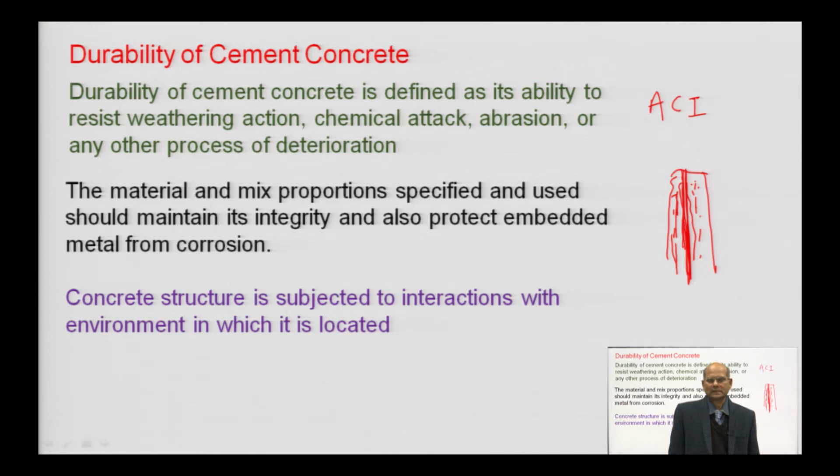Concrete structure is subjected to interactions with the environment in which it is located, so environmental factor is very important. What are the exposure conditions? Depending on that, different codes have given different exposure conditions. Indian standard IS 456 has also given certain environmental conditions, which we will discuss later.

This is the minimum working capacity of the structure. After that, our structure will not be fit for service. Initially we have 100% capacity here. As time passes, due to defects in the concrete, corrosion in reinforcement, abrasion, fatigue and other parameters, concrete strength will go down.

If there are more defects in concrete, the service life can reduce to, say, 35 years. Many structures constructed in Delhi, where I am staying in Dwarka, have durability problems. Structures constructed about 15 years back are showing cracks, severe cracks that need repair, and if repair is not done, within 4 to 5 years that building may collapse. So why is this happening?

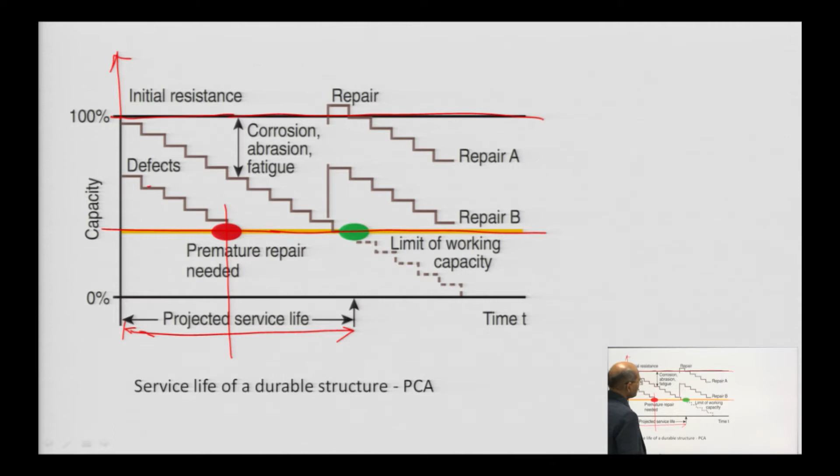Even if the structure has completed its service life, if you want to extend its life, what do we have to do? We have to repair the structure and increase its capacity. As you increase its capacity, slowly it will once again go and decrease. Similarly, we can go for extensive repair work so that the strength goes back to the original condition. In that case, this will go for some more time and reach here.

So, either you want to invest more money at a time and repair here, so that the life will increase, or if we do some patchwork or temporary repair work, then once again you need to repair.

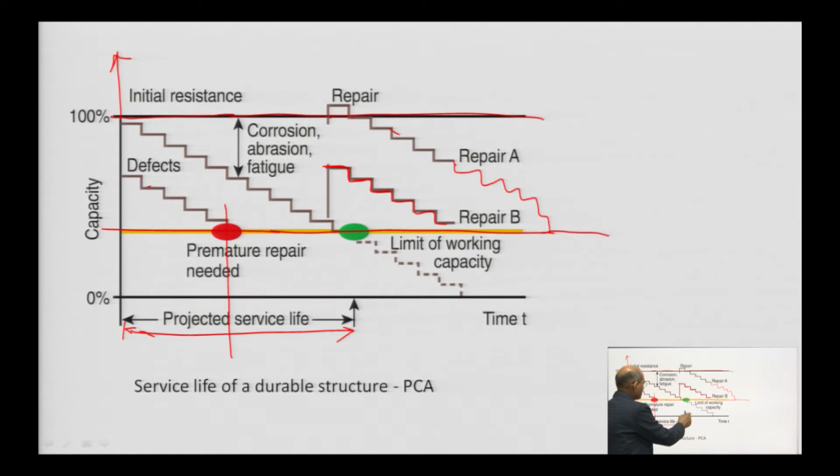So, service life of the structures depends on the durability. A durable structure will work for this period of time, that is, the design life.

The process of deterioration in concrete is due to sulphate attack, seawater attack, acid attack, ingress of carbon dioxide, chloride, water, oxygen, which leads to corrosion in the reinforcement, frost action, and alkali aggregate reaction.

Most of these, from item number 1 to 3, sulphate attack, ingress of carbon, or frost action, are directly related to permeability of concrete. If our concrete is more permeable, there will be ingress of components like carbon dioxide, chloride, sulphate, water, oxygen from the environment, which will cause deterioration in the concrete.

So the main fact is we have to make impermeable concrete, and that depends on many factors. Depending upon the environmental exposure condition, we need to change the type of cement as per the requirement.

So minimum amount of cement is also fixed. For a particular environmental condition, whether it is plain cement concrete or reinforced cement concrete, we have to give some minimum amount of cement.

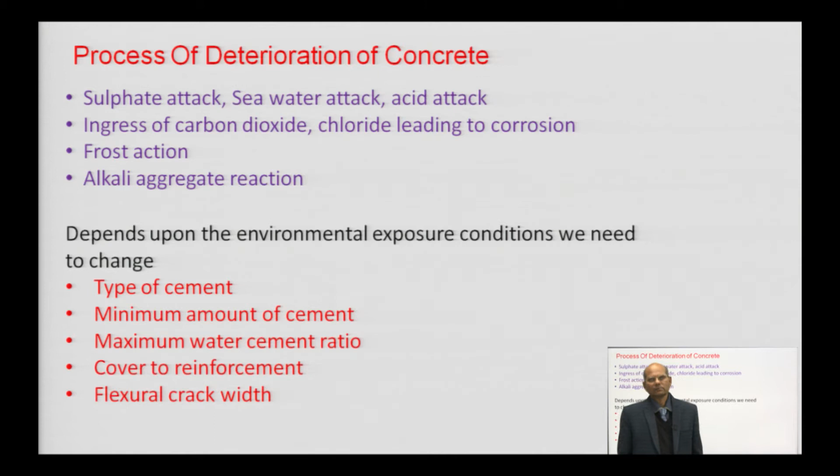So all these things we have to consider for durable design. Like this, I have shown certain structures here.

If you see, here is the Bhakra Nangal Dam, the second highest dam in Asia. This dam may be subjected to different types of problems, so those problems have to be addressed before the start of the work.

Similarly, here I have a cooling tower for a thermal power station. Here it is always subjected to water, so all these things have to be taken into consideration so that deterioration should not take place.

Photograph number 3 - here is an offshore structure. This structure is subjected to different kinds of environmental problems, like marine conditions.

The water of the sea is having lots of salt, so water is salty, and there is a rise in level - during high tide and low tide, water will go up and down. During high tide there will be a splash on this surface, and due to this splash, the structure is also under some problem.

And not only that, if you see the top structure, there also the environment is such that air is loaded, wind is also loaded with chloride. So all these things we have to consider here.

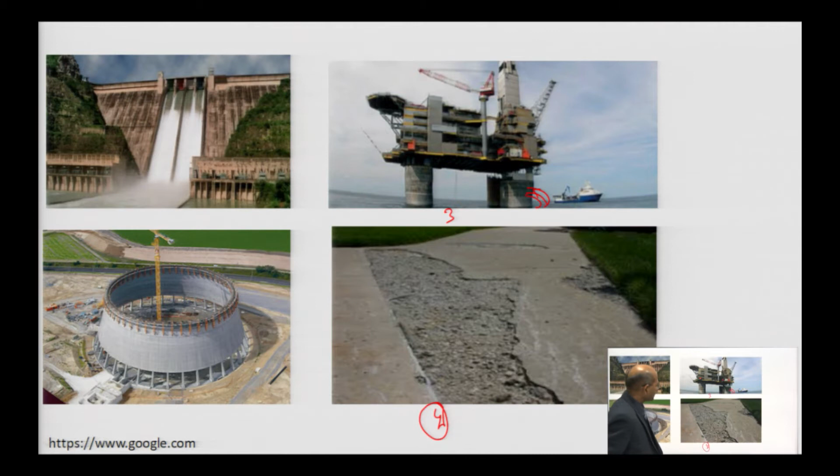This is plate number 4, showing deterioration observed due to frost action. Freezing and thawing action is creating this type of problem if you have not designed the concrete properly.

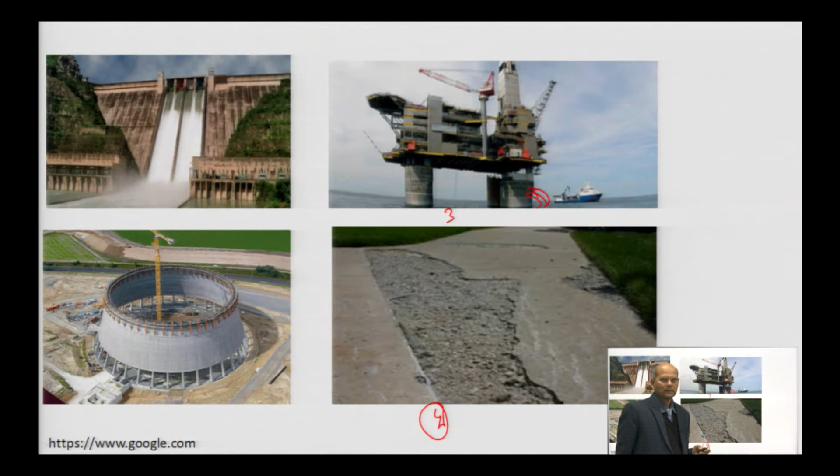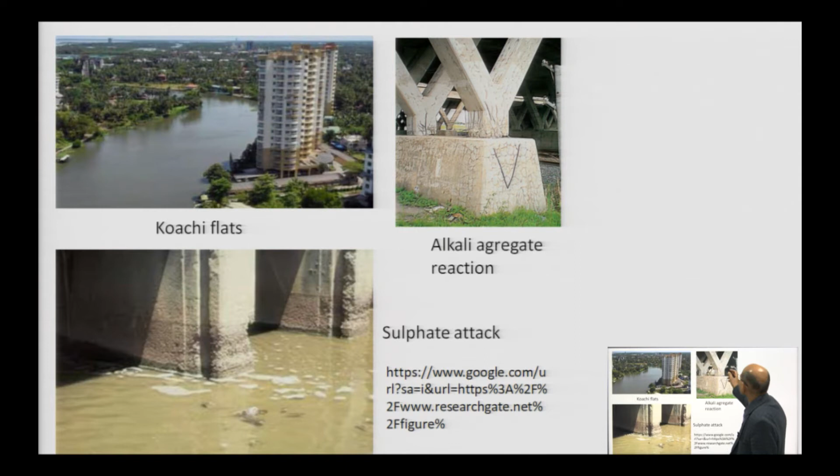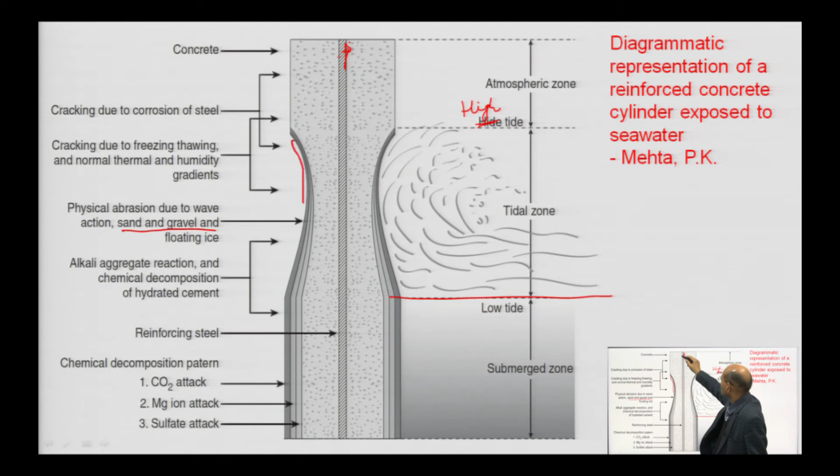And lastly, all these things, if this reinforcement is going to get corroded, the volume will increase. So after the increase of volume, what will happen? This structure will get cracked. Due to this corrosion, once again more ingress of oxygen, water, chloride will take place, and due to the penetration of these harmful ingredients, rate of corrosion will increase.

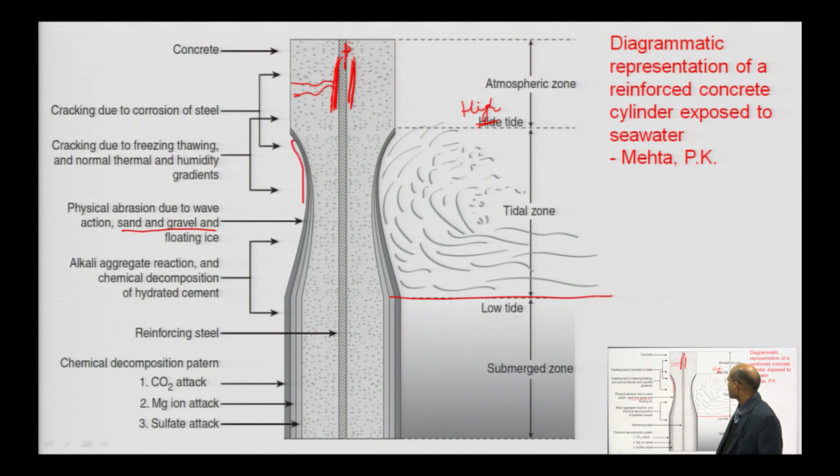So these are the actions which we have observed, how this thing is going to affect our concrete. So durability is directly related to the permeability. If our concrete has been made giving due consideration, then certainly it is not going to deteriorate, it will serve its life.

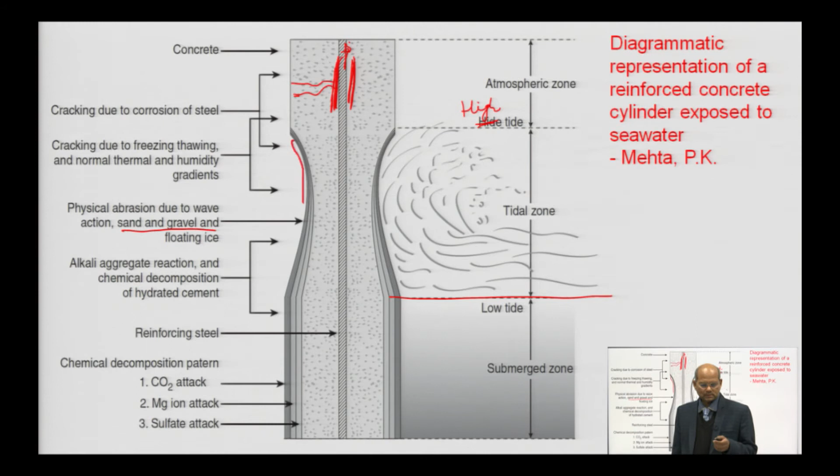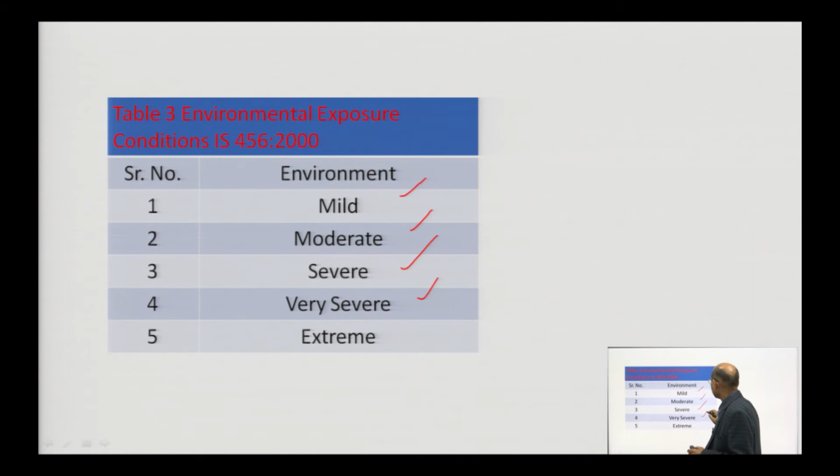So if you see here, this is IS 456, we have 5 exposure conditions, environment. We have mild exposure, moderate exposure, severe, very severe and extreme. If you go to Japanese code, they have divided into 3. If you go to Euro code, they have also classified. So each and every country, based on their environmental conditions, has classified their environment in a different way. For India, we have divided this into 5 zones.

It may be even in one place also, that portion may be mild or moderate. Suppose we take the example of Delhi, which I have mentioned in the earlier lecture, like Dwarka. So the ground is having lots of sulphate and chloride more than permissible limit. And if you consider the slab, it is inside your room, not directly subjected to carbon dioxide or more water vapor or chloride or sulphate. So you can consider that mild, but soil depends on the area, we can consider their foundation is subjected to moderate or severe conditions.

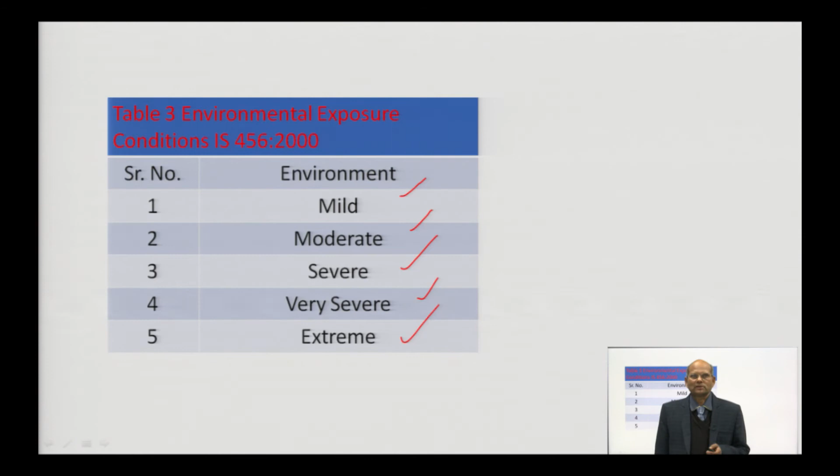Based on that, we have to design the concrete. So mix proportion we have to take care, so that our mix design should be related to this exposure condition. These are the exposure conditions which has been explained here. If concrete surface is protected against weather or aggressive conditions except those situated in coastal area, you can say it is a mild exposure condition.

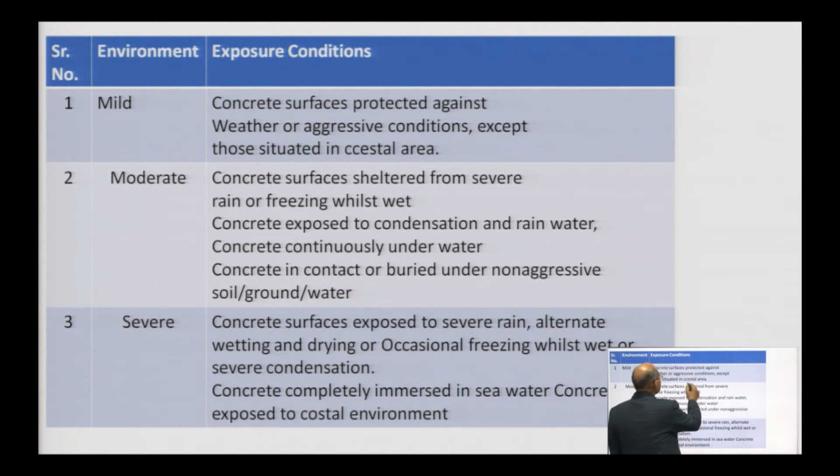Even if the surface is protected, if it is in a coastal area, you cannot consider it a mild exposure condition.

Similarly, we have a moderate condition. Concrete surface sheltered from severe rain or freezing, while wet concrete exposed to condensation and rainwater. Concrete continuously under water, concrete in contact or buried under non-aggressive soil, ground or water.

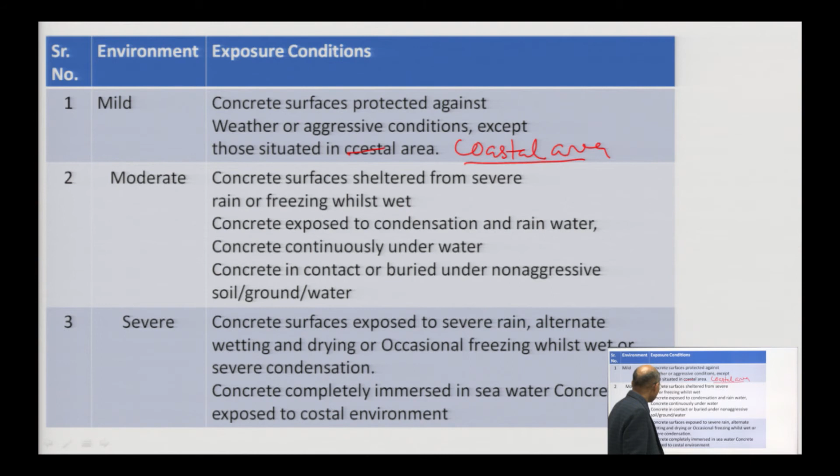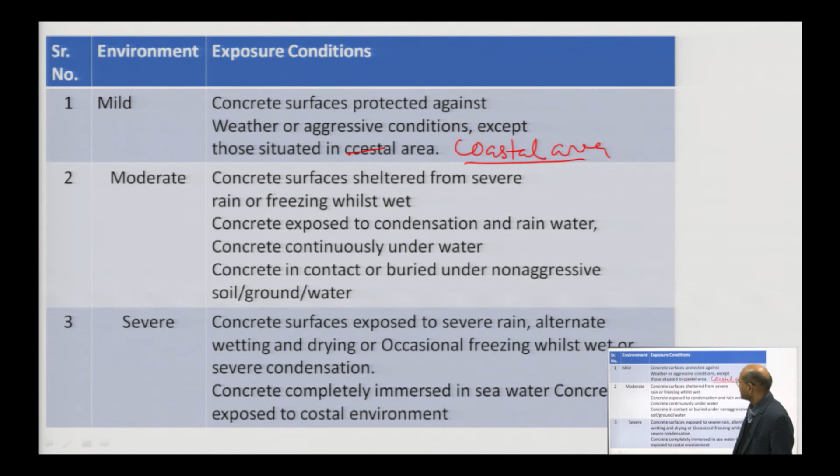So what is severe? We are observing concrete surface exposed to severe rain, alternate wetting and drying, or occasional freezing whilst wet, or severe condensation. Concrete completely immersed in sea water, concrete exposed to coastal environment - all this is severe condition. So if our structure falls in this category, we have to plan our design mix based on that.

Similarly, we have very severe conditions. What is very severe condition? Concrete surfaces exposed to sea water spray, corrosive fumes, or severe freezing condition while wet, concrete in contact with or buried under aggressive subsoil or groundwater. So suppose we are considering an area which is nearer to the coastal area, we have to consider the very severe condition.

Similarly, extreme condition - that is the maximum condition: surface of members in tidal zone, members in direct contact with liquid or solid aggressive chemicals. Suppose you want to make a silage which is subjected to aggressive chemicals like acids, you have to take special care for design of the mix.

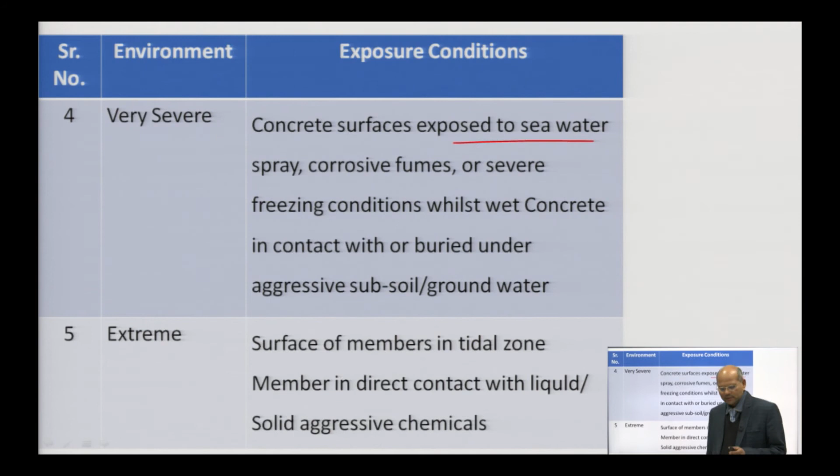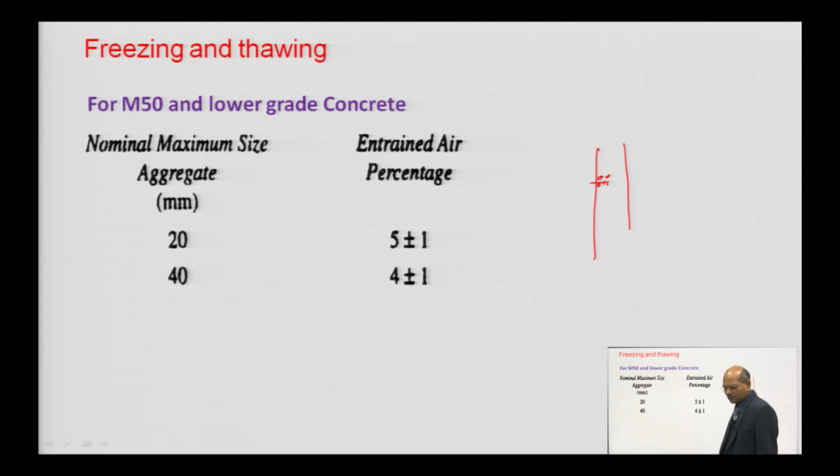So freezing and thawing - what is that? Suppose your structure is in Simla or Srinagar, where rainfall or snowfall is there. At that time water will enter the pores. Water will enter the concrete capillary and it will get frosted.

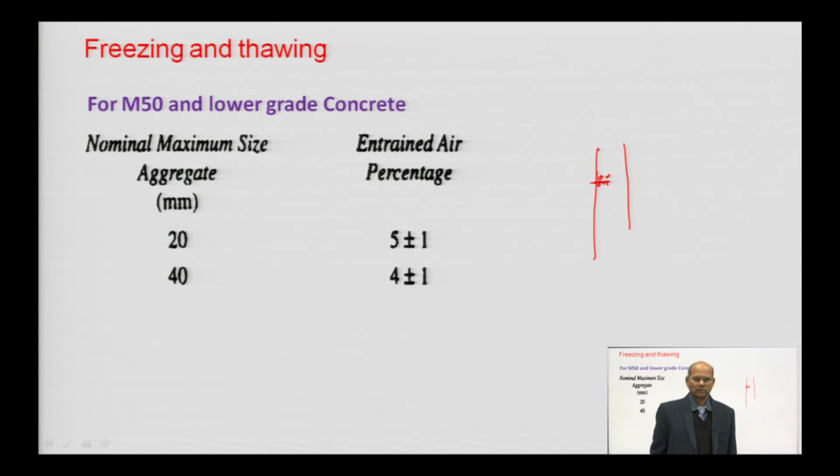After the frosting, it is going to put a certain pressure on this. So this pressure will increase the crack. Thawing means when water will come out, due to the rising temperature. That time once again - freezing and thawing is a cycle.

So once again another cycle of snowfall or drop in temperature, moisture will increase this crack and once again volume will increase, because the volume of snow is more than the volume of water. Water is having a peculiar property: at 4 degrees centigrade volume is constant, and if you go above or below 4 degrees centigrade, the volume increases. Due to the increase of volume, they exert lots of pressure and finally cracks will develop.

Considering all this fact, what we have to do is make the concrete which is having air entrainment. Generally air will always be there, 1 to 2% in the concrete, but if our concrete is subjected to freezing and thawing, we have to introduce air bubbles, we have to entrap the air in the body of the concrete.

Suppose a bubble is here on the concrete surface - if water goes here, it will percolate and this part will be subjected to pressure, and this portion will only get a crack, and it will join here. Due to this circular nature of the small bubbles, stress concentration is not there, so the crack will not further propagate.

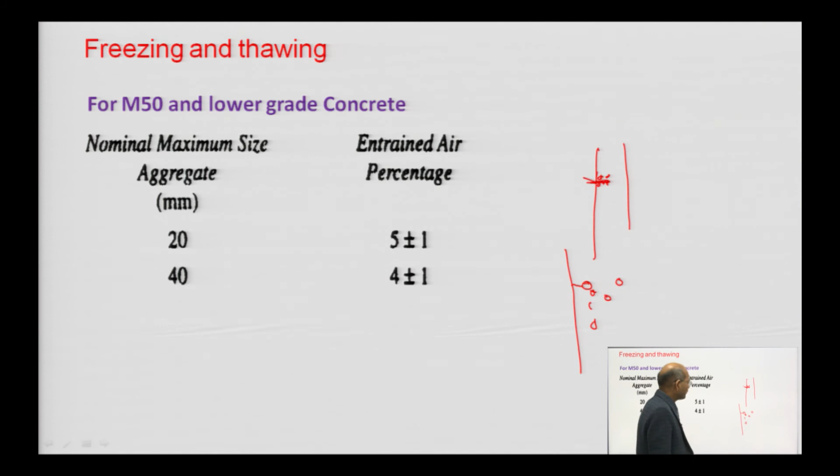So to stop that, what do codes say? If our grade of concrete is M50 or lower, and if it is made of 20 mm downsize aggregate, then entrapped air should be 5 plus minus 1%.

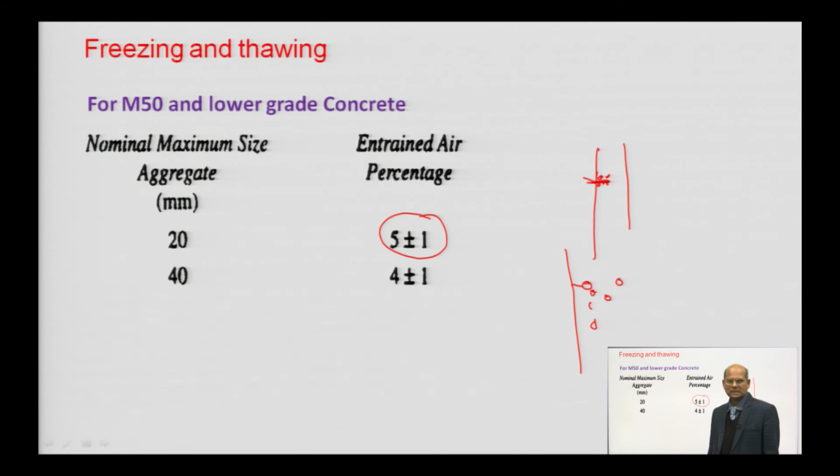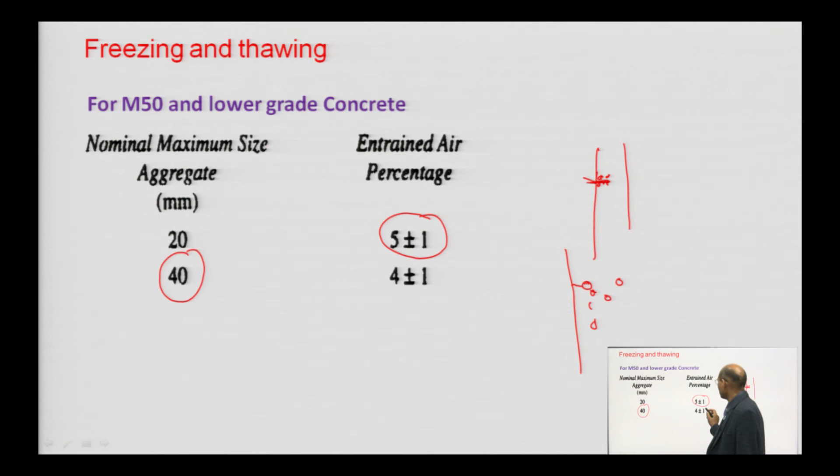So, for that we can use aluminum powder to generate air bubbles. Similarly, if our maximum size of aggregate is 40 mm, then we have to entrap air for 4 plus minus 1%.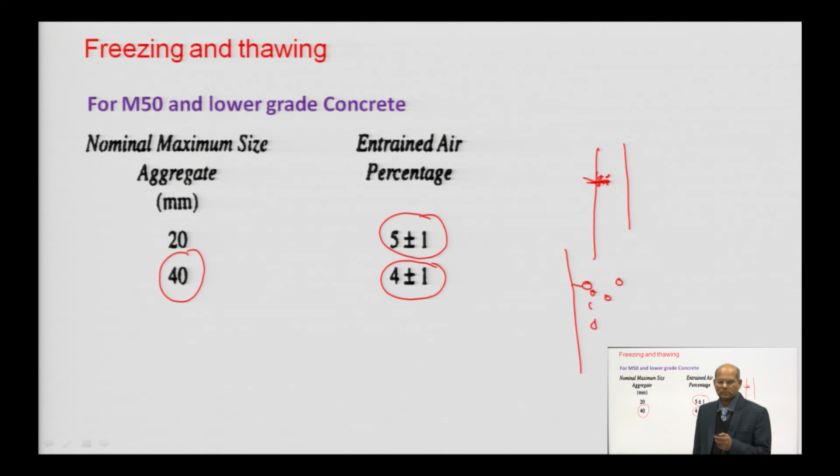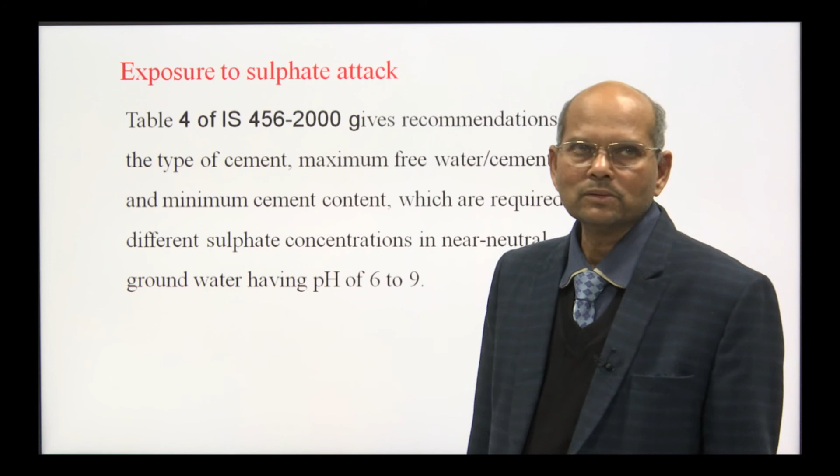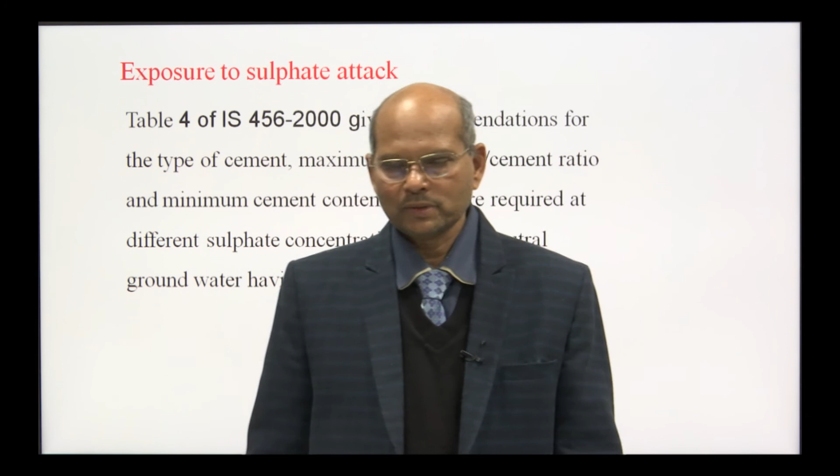If your structure is subjected to sulphate, what will happen? The sulphate will react with the calcium hydroxide and produce ettringite, whose volume is very high. Sulphate also reacts with alumina, because if the C3A component is more than 8% in the cement, that also reacts with the sulphate ion to produce ettringite. Since the volume of ettringite is very high with respect to the concrete, it puts pressure on the concrete and cracks develop.

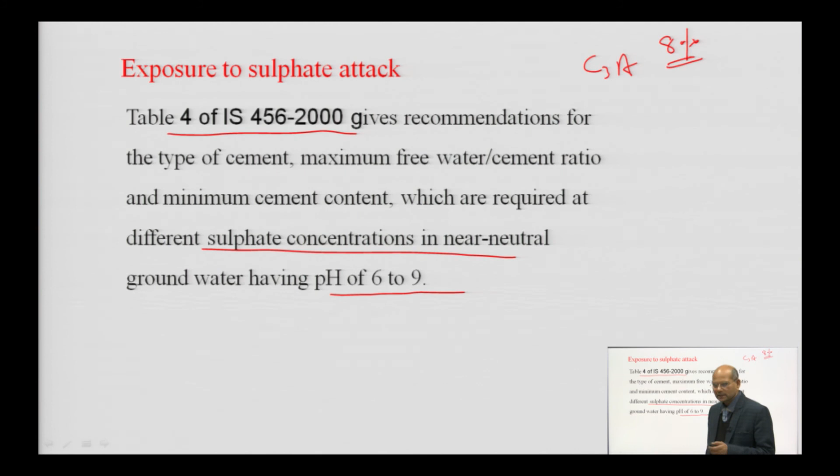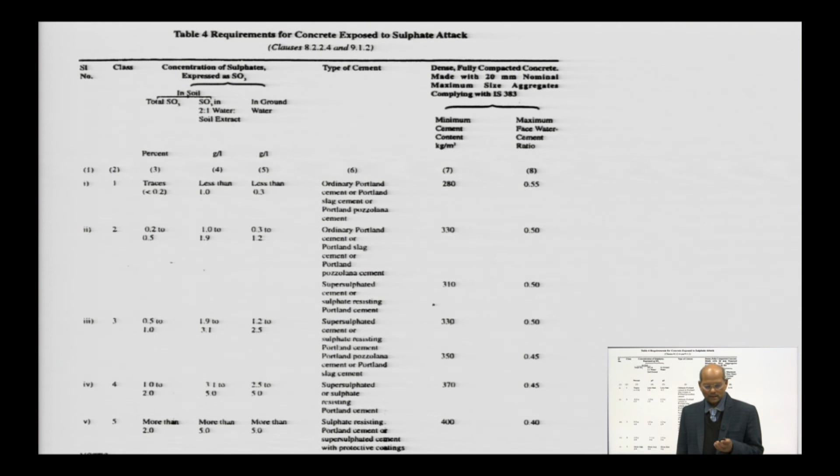So, there is Table 4 in IS 456 which we refer to in order to understand exposure to sulphate attack. You should download IS 456, which we will study during design of structures. Based on the exposure condition and amount of sulphate attack, it specifies the type of cement, maximum free water cement ratio, and minimum cement content required at different sulphate concentrations. These concentrations are given for water with pH value 6 to 9. Let me show you Table 4, although it's very small here since I copied it directly from IS 456, so please download and see the conditions yourself.

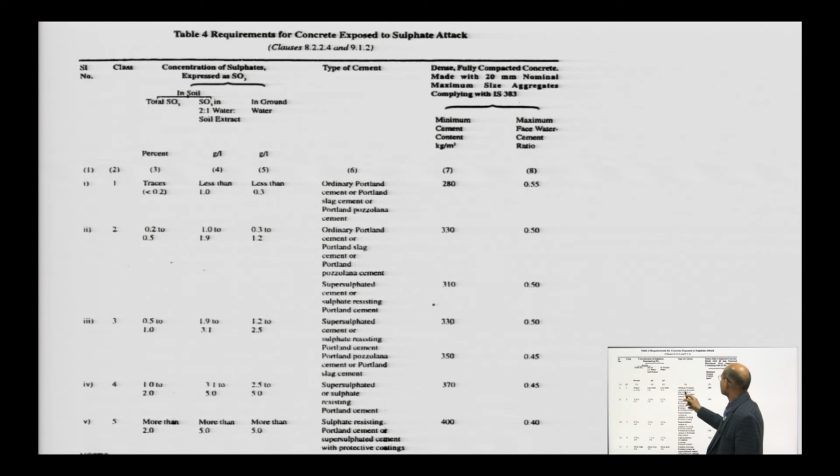Let us say our total SO3 is less than 0.2%. In that case we can use ordinary Portland cement, Portland slag cement, or Portland pozzolana cement, with minimum amount of cement as 280 kg per meter cube and maximum water cement ratio as 0.55.

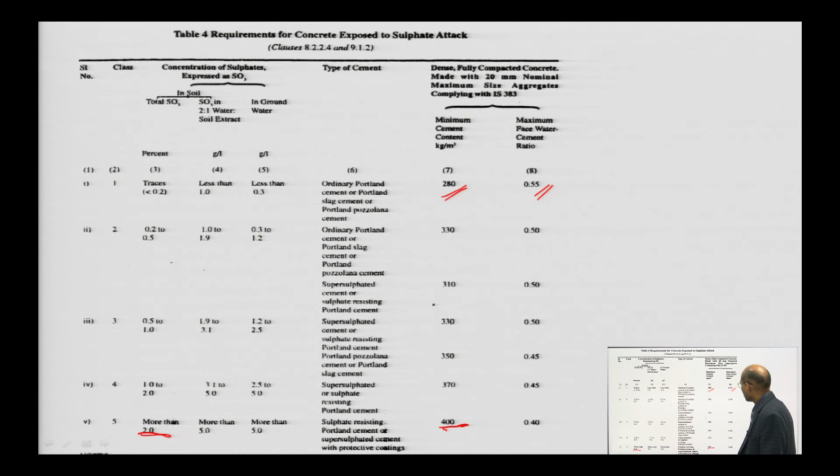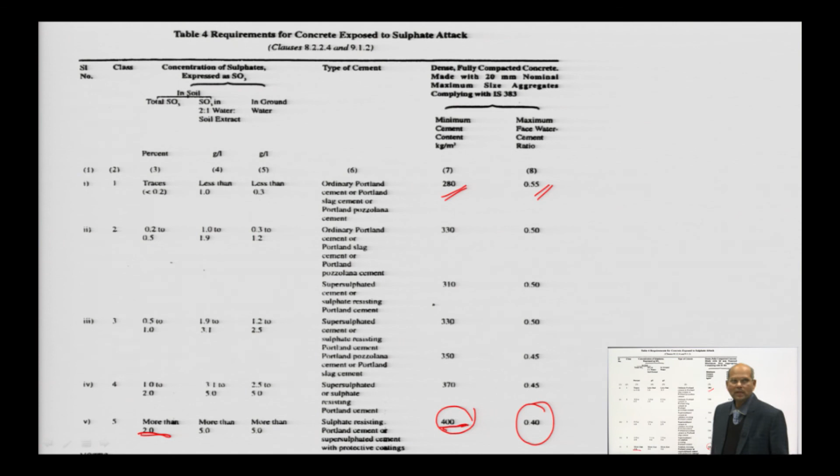Similarly, if the concentration is more than 2, in that case we have to use a minimum of 400 kg per meter cube of cement, and the type of cement should be Portland cement, sulphate resisting Portland cement, or super sulphated cement with protective coating. We also have to provide certain protective, non-permeable coating. So minimum amount of cement and maximum water cement ratio are restricted, and you have to refer to this code while designing the mix.

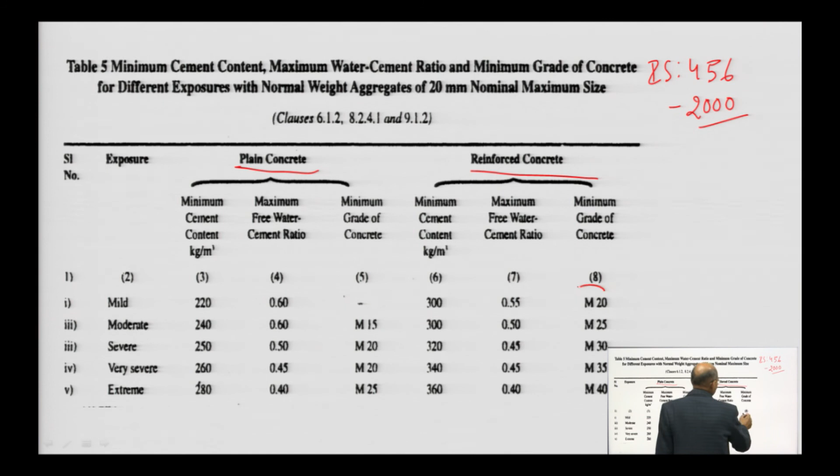Now if you see Table 5, once again taken from IS 456:2000, for mild exposure they have given requirements for plain concrete and reinforced cement concrete. The minimum grade of concrete cannot be less than M20 even for mild exposure. For extreme exposure, the minimum grade of concrete has to be M40, and you can't use less than M40. Similarly, maximum water cement ratio is restricted to 0.4 for extreme condition and 0.55 for mild exposure. Minimum amount of cement is 300 kg for mild and moderate exposure conditions, and for severe condition it's 320 kg, very severe 340, and for extreme condition 360. This is what's required for RCC work.

Similarly, for pre-stressed concrete, the grade of concrete is also mentioned - what should be the minimum grade of concrete. If you want pre-stressed concrete, you have to refer to IS 1343:2012, from which you can get their requirements.

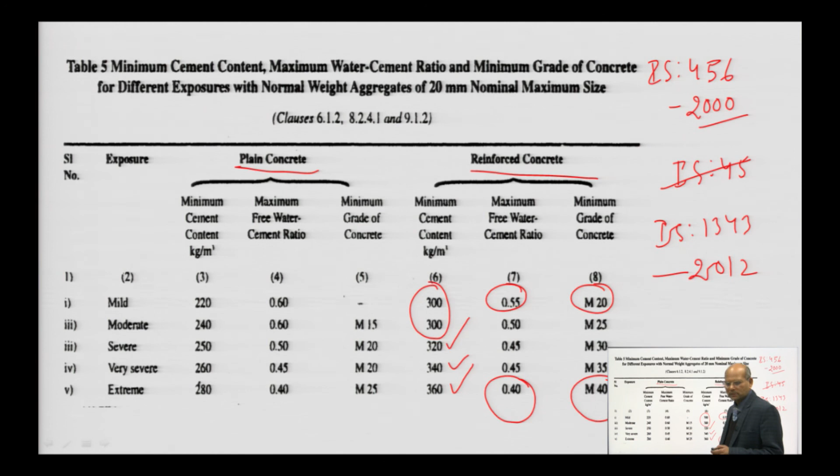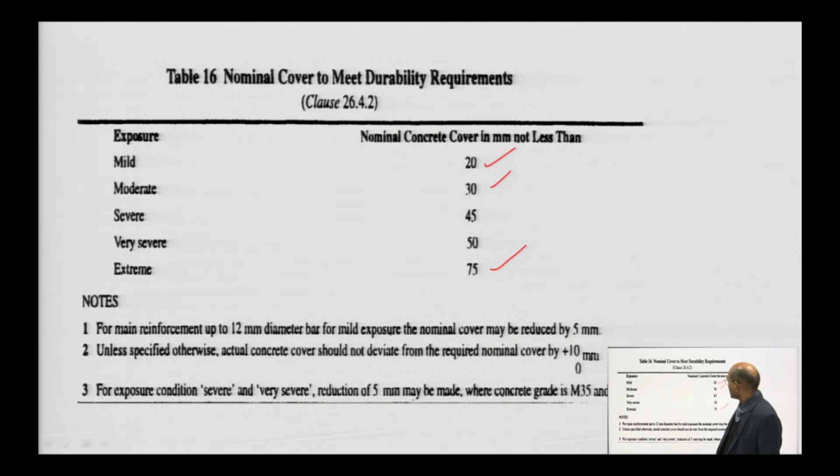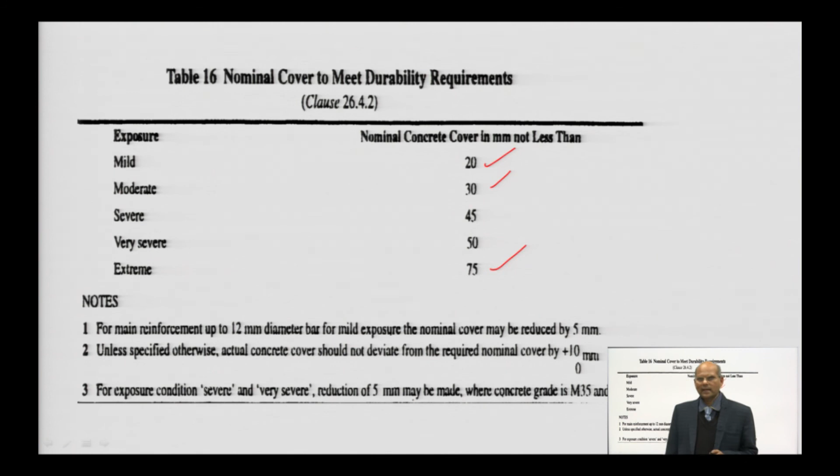If you see the IS code, it also talks about cover. To meet the durability requirement, if subjected to mild exposure, like a slab, you can't use less than 20 mm cover; for moderate it's 30, and for extreme it's 75. Like that, they have given durability requirements for clear cover. Similarly, cover is also required for fire protection. So we have to consider different durability requirements, and in the next lecture I will discuss how corrosion takes place in the reinforcement.